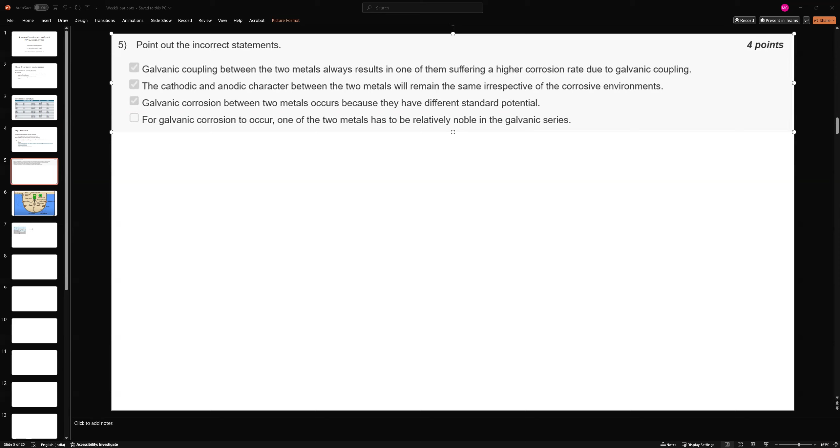So in that case, wouldn't the statement be incorrect still? If you have gold and platinum, there's no corrosion reaction taking place. So this statement, that one will suffer a higher corrosion rate, would be incorrect, right? Oh, it is given as incorrect. Then that's okay.

And you also had two questions. In ICCP, what reaction is taking place at the anode surface to balance the charge transfer? Yes, from the last session I requested you to discuss. What I found was, in the case of sea, the chloride ion in the salt would react and become chlorine gas. Similarly, if the noble anode is underground, the reaction would be oxygen evolution reaction. So that would balance the charge transport.

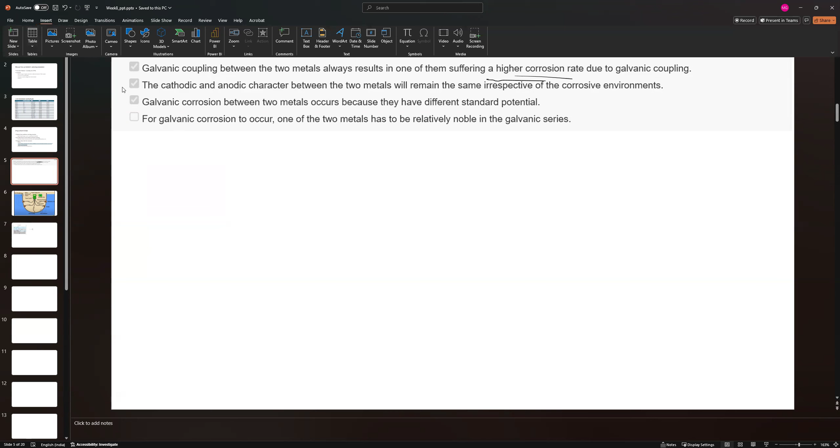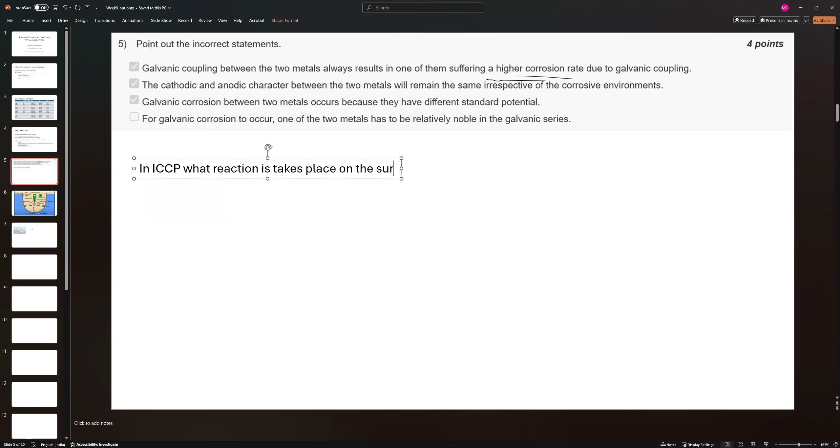So the question was, just for others to know: in ICCP, what reaction takes place on the surface of a noble anode to balance the charge transfer?

So in this case, the noble anode is protecting the hull of the ship, and the anode surface can be titanium, like that, titanium.

I thought, if it's platinum usually, it's acting as a catalyst for the reactions to take place, so it's not taking part in the reaction. That's another reaction taking place. Right. Yeah, that's what I found.

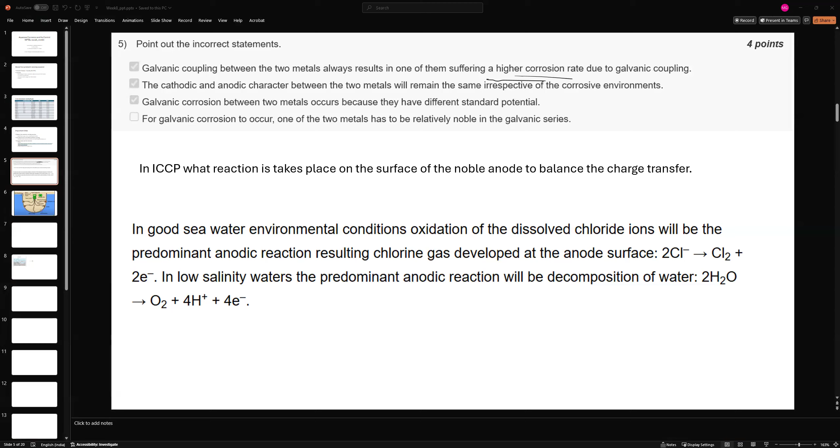I think on the metal side, it probably looks something like this. And here, we are applying external voltage to suppress the corrosion. And on the other side,

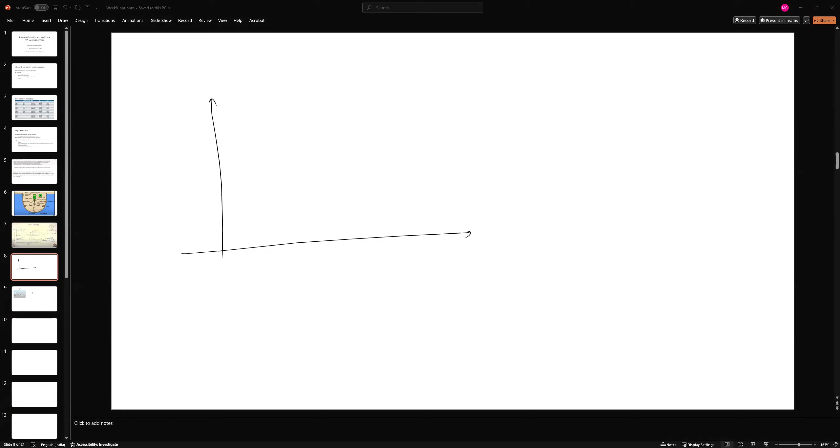I'm just thinking, what's the reduction potential for that? The platinum would be to

Actually, in this case, I think the potential of the anode, unlike in the galvanic case where the anode is negative with respect to the protected metal, will be positive with respect to the metal being protected, since it's an inert anode. Some different sort of diagram will be drawn in this case.

This would probably be the diagram for the metal at the cathode. Peak wouldn't be this. This is fine. Okay. Yes, that would be shifted even. Not sure.

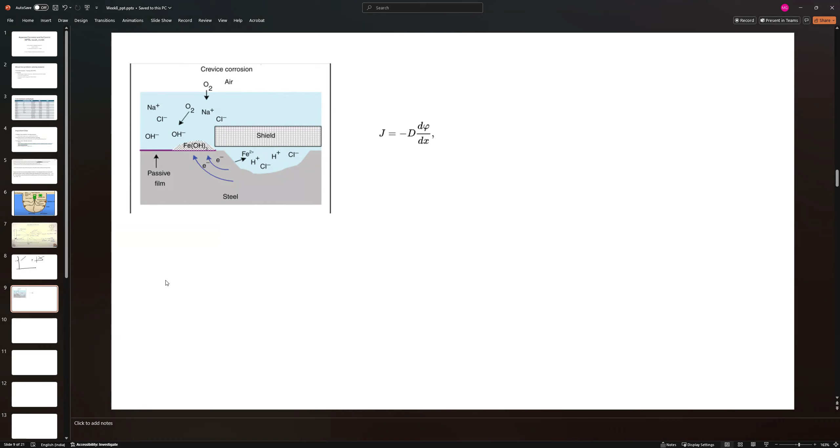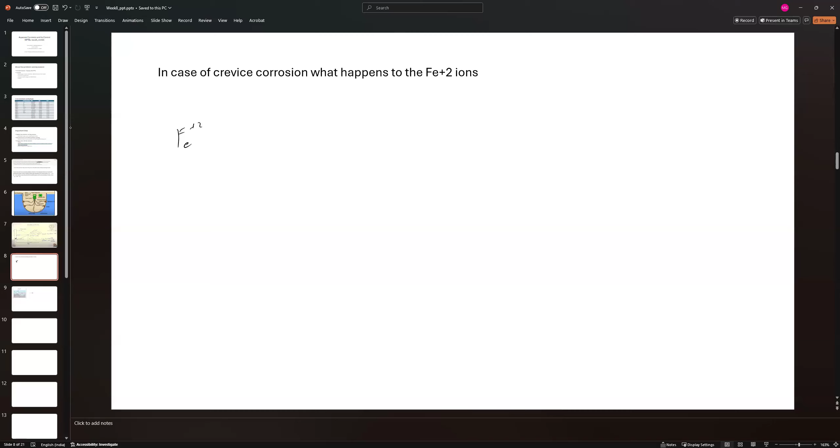Okay. And you had another question. In case of crevice corrosion, what would happen to Fe2+ ion concentration? Nice. So I got two answers. From corrosion, you get Fe2+ ions. Now they can react with the water to form hydroxide plus you get H+ ions. One thing that happens is this iron hydroxide gets diffused and gets deposited on the mouth of the crevice. When diffusing, it forms a film deposit on the mouth of the crevice.

Another thing is when the chloride migrates in, you can also get iron chloride, FeCl2, and that can also diffuse out since the concentration here is higher. Again, the crevice is still open to some amount of diffusion. If water has very low solubility of oxygen, the concentration of oxygen in the solution is low. So according to Fick's law, rate of diffusion J equals minus D dφ/dx.

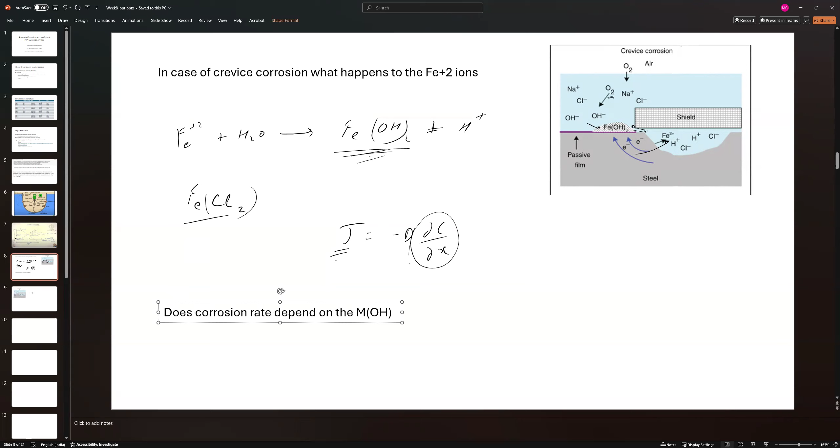And we had a question like, what would happen? Corrosion will depend on the metal hydroxide solubility because of dissociation. If it's less soluble, this equilibrium would move forward, right? More of the iron would get converted into hydroxide, and your pH would decrease. So what I found was the pH would decrease further. So if your hydroxide can easily dissociate, your pH will be lower, and then corrosion will be more. Hope this makes sense.

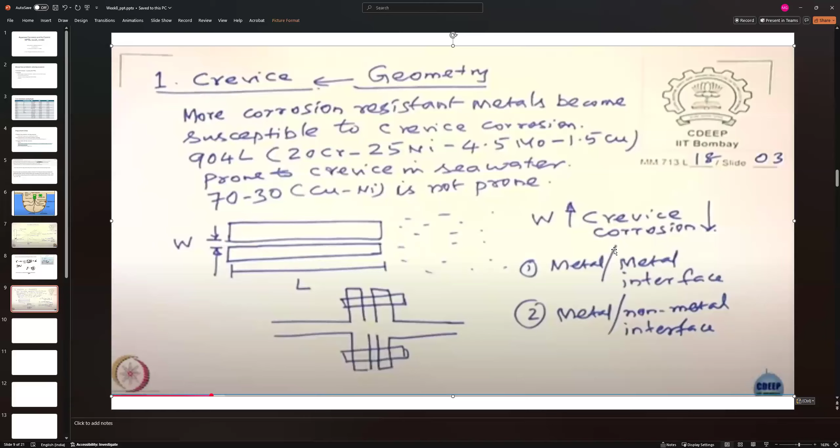So we generally discuss what factors influence pitting and crevice corrosion, and that will be helpful for you to answer the questions. So factors affecting crevice corrosion. Geometry is one. As we decrease the width, we are limiting the diffusion of the oxygen inside the crevice. So decreasing width reduces O2 diffusion, which is increasing the corrosion of the crevice.

And similarly, if you had flowing water over it, you'd have a bit higher diffusion of oxygen inside the crevice, which would decrease the corrosion. Stagnant water would increase crevice corrosion. Other factors are oxygen content in the water, pH, presence of chloride ions, temperature, agitation. As pH decreases, corrosion increases; as temperature increases, the diffusion increases, but maybe diffusion is not the main reason. Chloride ion again attacks the passive layer and increases the corrosion.

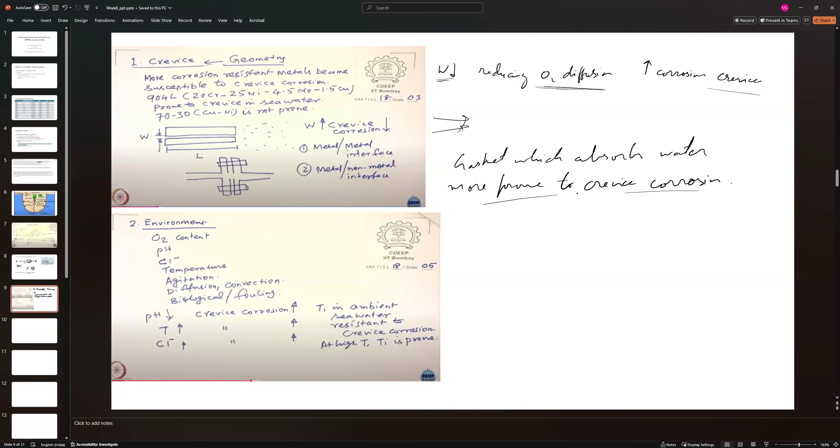Type of gasket selected. So if you have a gasket which absorbs water, it would be more prone to crevice corrosion. And if you're able to eliminate the crevice completely, like with welding, then you can reduce crevice corrosion. You can also apply sealant to isolate your crevice.

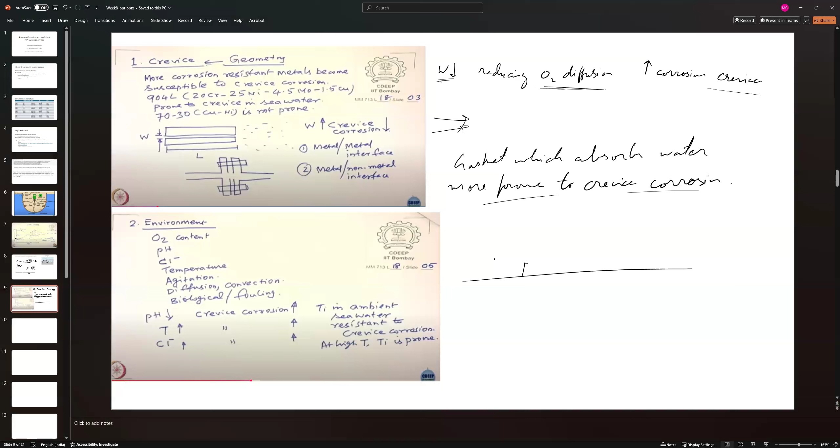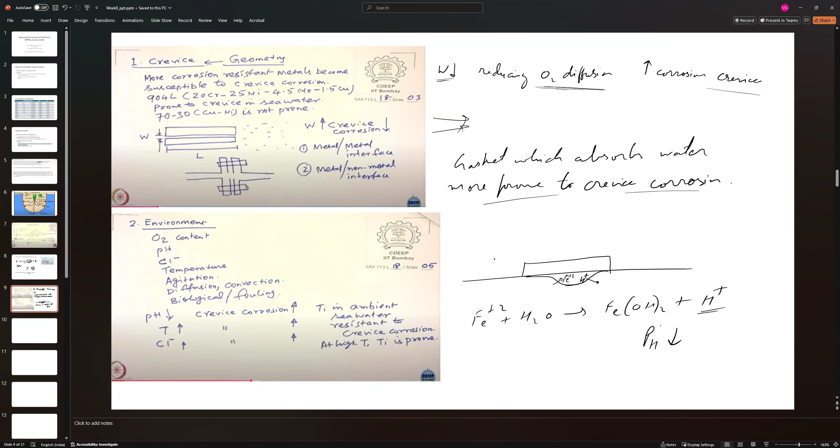Autocatalytic means, okay, so this is your crevice which is forming. Here your metal is getting oxidized, so Fe2+. What's happening is Fe2+ is reacting with water to give you iron hydroxide and H+. This H+ is making the environment inside the pit more acidic. So pH is decreasing. Since pH is decreasing, that's increasing your corrosion rate, so this reaction goes even further.

So your reaction is Fe goes to Fe2+ plus 2 electrons. So this leads to this, and this leads to more corrosion. That's what autocatalytic means. Autocatalytic is self-catalyzing in a way. Once the reaction starts, it's helping itself progress faster and faster. Yeah, so it's self-propagating, a positive feedback loop. That's what autocatalytic reaction means.

Then there is some regarding crevice corrosion. An example, copper. What kind of alloy you're choosing also affects crevice corrosion. So 70-30 copper nickel alloy is not prone to crevice corrosion, and stainless steels are. So compared to those, it's more prone to crevice corrosion.

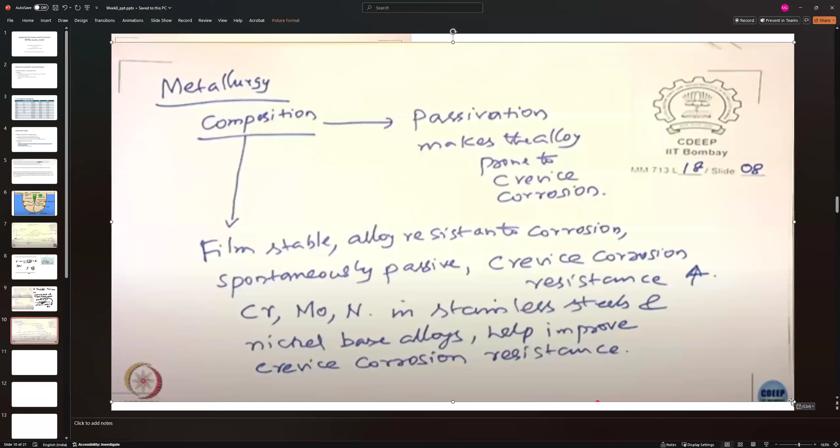And we had the effect of different alloying elements in the steel. Adding chromium, molybdenum, and nitrogen in the steel improves crevice corrosion resistance. Yeah, whichever. This is the best, the most crevice corrosion resistant metal. And then stainless steel you can compare depending on the concentration of these metals, which is more resistant.

The last one, yeah. I think that should cover the questions asked in the assignment, like what factors affect crevice corrosion. Now we can discuss pitting.

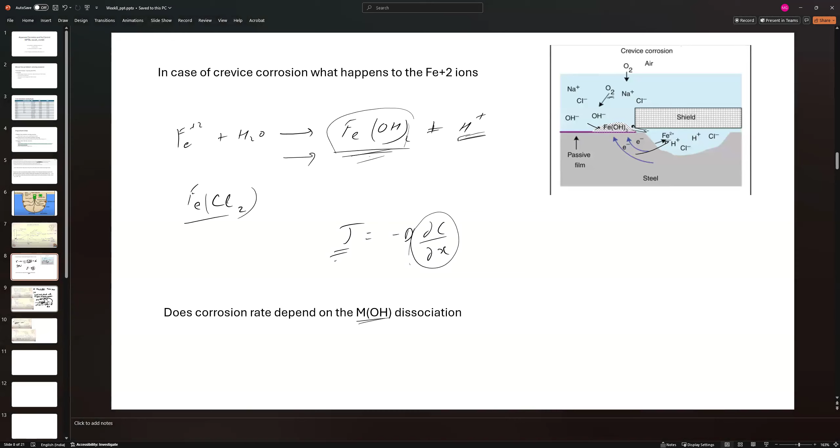Yes. The first question is about the autocatalytic nature of crevice corrosion. So I already told you, as the metal is getting dissolved, it's forming metal hydroxide that is increasing the hydrogen ion concentration. So the pH will become more acidic. And what else? For crevice corrosion, you want stagnant water, right? You want lower diffusion of oxygen.

I think that relates to the last question. If you have a stagnant and flowing NaCl solution, which will fail first? If you're in the stagnant solution, you'll have lesser diffusion of oxygen and more crevice corrosion, so that will fail first. And crevice corrosion question: which following statement is incorrect. Here again, the gasket which can absorb water is more prone to crevice corrosion.

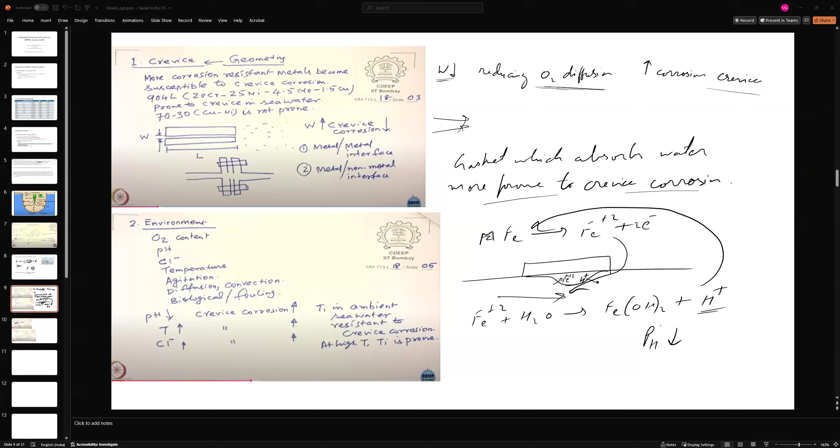So, I think it's mentioned in the slide. Yeah, that's fine. So to prevent crevice corrosion, you want the solid non-absorbent gasket. And comparing the stainless steel and the copper nickel alloy, the copper nickel alloy is more resistant to crevice corrosion.

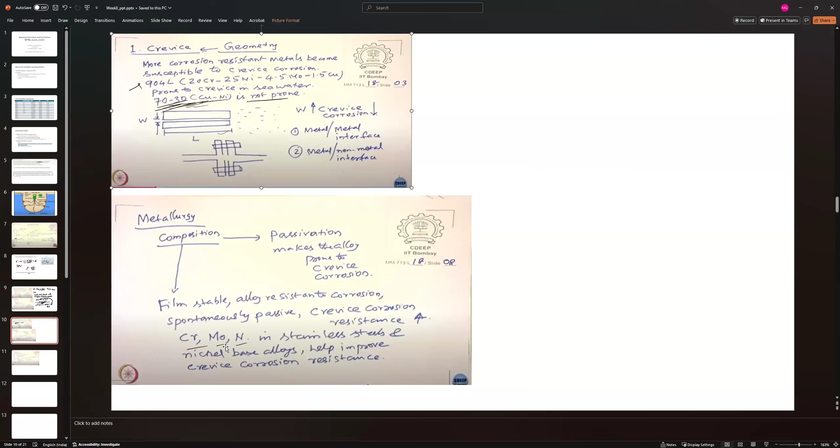And if you want to compare two different stainless steel grades, in this case everything is equal, just the molybdenum; one has more moly and the other has less. Molybdenum increases resistance, so that's more resistant. So the crevice corrosion part of the assignment, I think I have answered. I can discuss more about pitting corrosion. So pitting, what are the factors that affect pitting?

Moving through the slides, a little bit up. So factors which are affecting pitting corrosion: one is depth of pit. If the pit is stable, your pitting corrosion will happen more. So stable pit means the chemical environment inside the pit is stable. That's why you also want stagnant water.

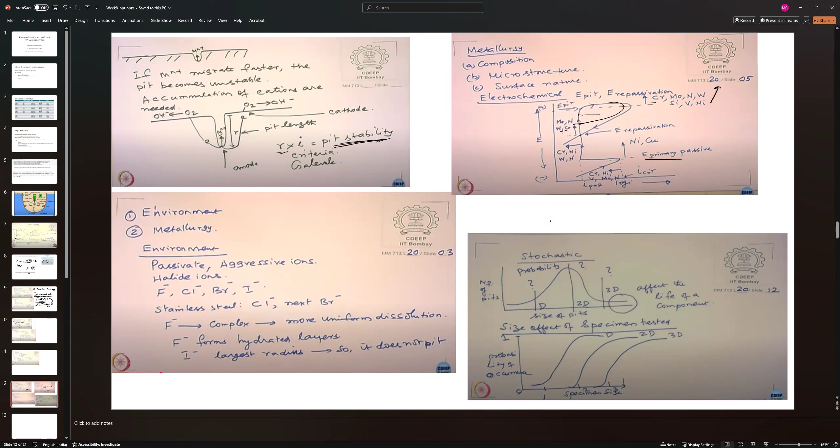And I think we talked about surface roughness. Surface roughness actually increases your pitting. And if your equilibrium metal potential is high, so if metal is more noble, it's less prone to pitting corrosion. And surface area. Since pitting is a stochastic mechanism, it depends on probability. So if you have higher surface area, you'll have more probability of having defects which promote pitting, which increases your chances of pitting corrosion.

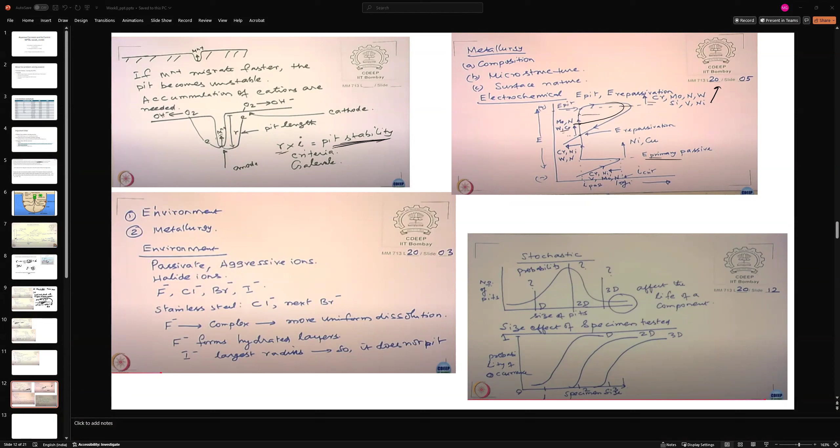And to check what else affects pitting: more aggressive ions like chloride reduce your pitting resistance, so increase pitting. Your depth, as I mentioned already, affects your pitting tendency, and applied potential. If you're making metal more noble, that will affect your pitting potential. And then there was the PREN number.

If you want to compare different steels for their pitting corrosion, you can use this PREN number. So this is percent Cr plus 3.3 times percent molybdenum plus 0.5 times percent tungsten plus 16 times percent nitrogen. So you can use this one.

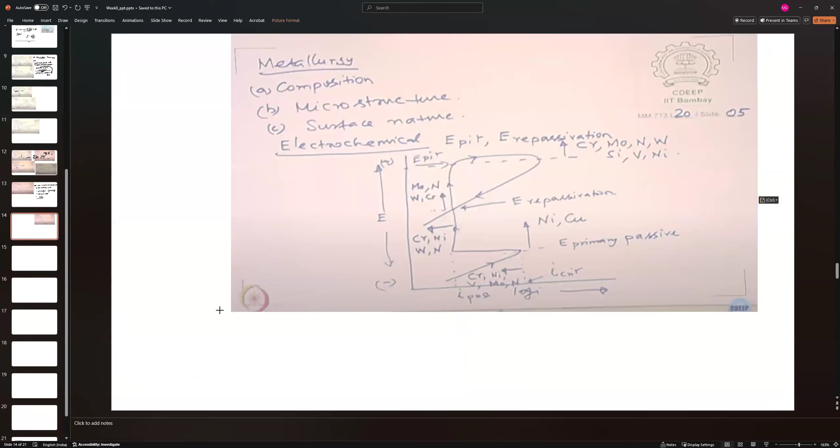Yeah. Repassivation potential. Okay. Right. This is your repassivation potential. E repassivation. This increases, your pitting tendency decreases. Okay. Surface roughness, I think you mentioned in the class. Surface roughness increases, the pitting tendency also increases. Finally, surface area is low. That's this case.

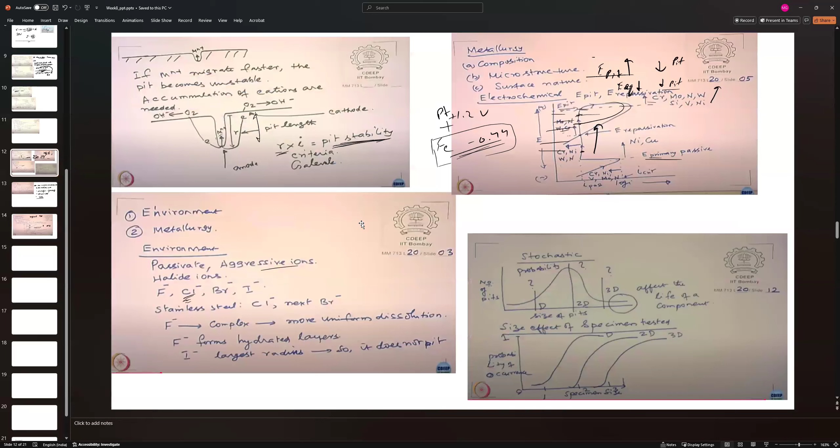Since it's a statistical, stochastic effect, the initiation of the pitting is a microscopic phenomenon, so kind of random where the pitting will happen. And if you have a small sample, you have less probability of getting this initial defect where the pitting will happen. If you have a larger section, you will have more probability of these pit initiators to take place. So as you increase the specimen size, the probability of occurrence of pit increases.

So, if it has low surface area, will pitting tendency increase or decrease? Sorry. The surface area increases, the pitting tendency increases. And for the second one, you just have to see which ion is more positive and a better oxidant, that will cause oxidation of the metal. So which has the most positive potential will be the strongest oxidizer. Anything else?

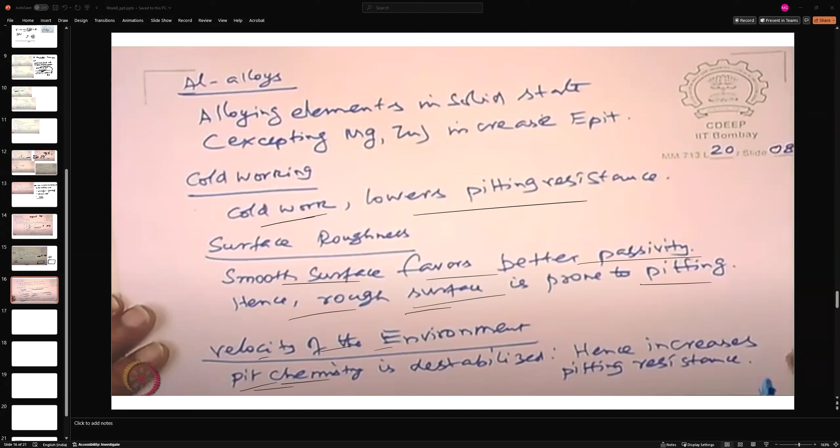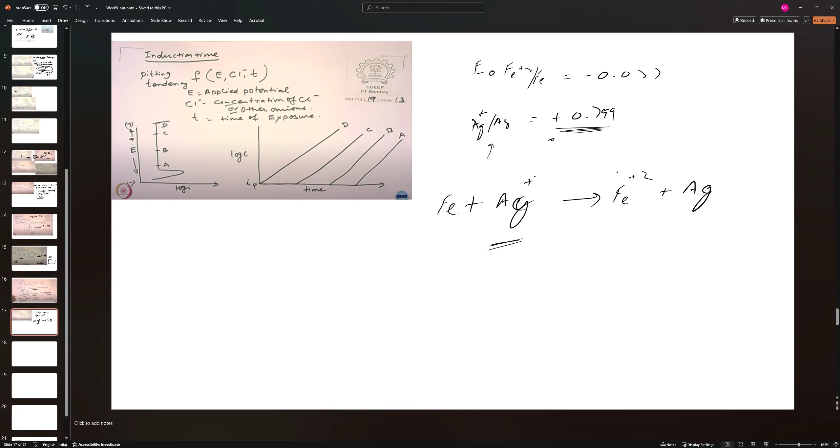So whichever has the highest reduction potential, if you calculate the delta E naught for this reaction, this will be the most favorable reaction compared to this. So that's how you can decide which solution will be most susceptible to pitting.

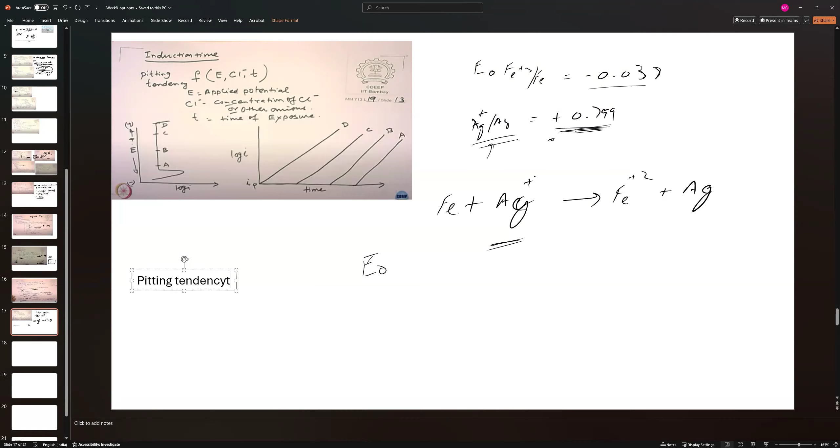I'm trying to see if I can justify that the pitting tendency of metal increases if the equilibrium potential of the metal is high. According to me, it should be. But for some reason, the solution I have, and this is the solution they've been following since the beginning of the course, said the statement is incorrect. Since the statement is... Yes, yes. It's the first option. This one.